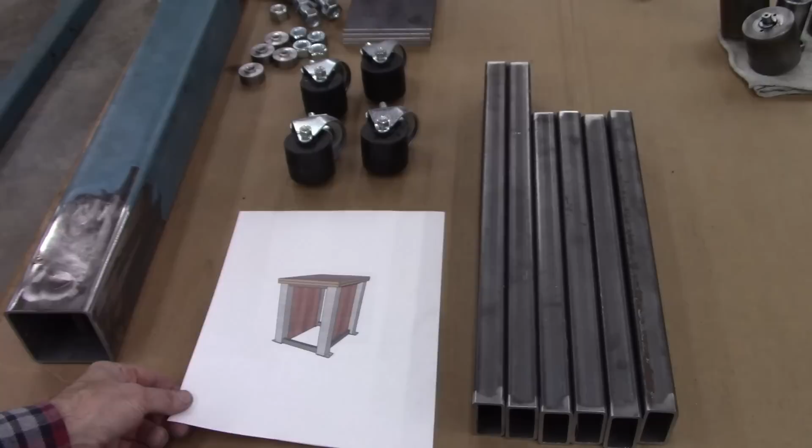Here's the parts for the stand we're going to build. Got some casters. These will have 2 holes drilled in them, and one will be a support bolt, and one will be for the caster. And I'll weld them on the bottom of this tubing I got.

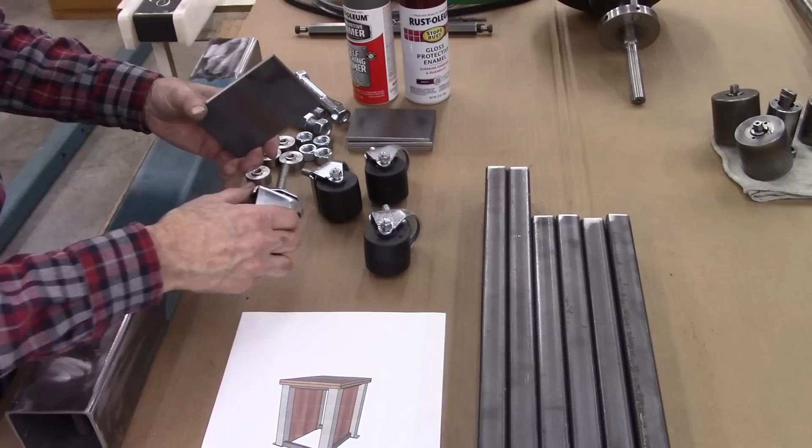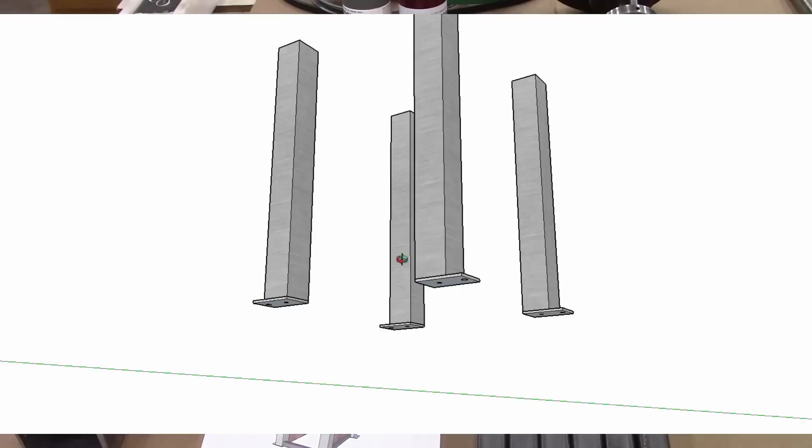Let me show you in CAD what we got. Here's the 4 3x3 legs, and then we're going to weld these plates on the bottom with the 2 holes. One is for a bolt to lift it up off the casters and solidify it, and the other one is for the casters. And then we're putting in the 1x2 tubing between the 4 posts, top and bottom, and then put a top on it.

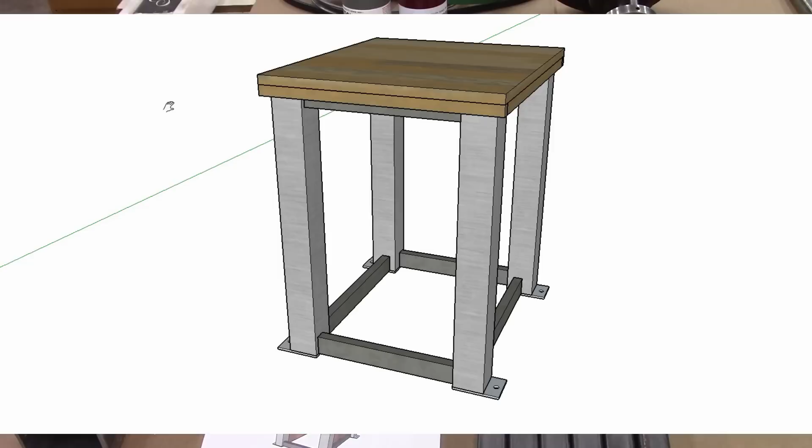And then I'm going to weld those 1x2 tubings on the sides so I can insert a sheet of plywood, and at some future date I will put some drawers in it. I'll make it similar to the cabinet I put under my South Bend. Anyway, let's get started.

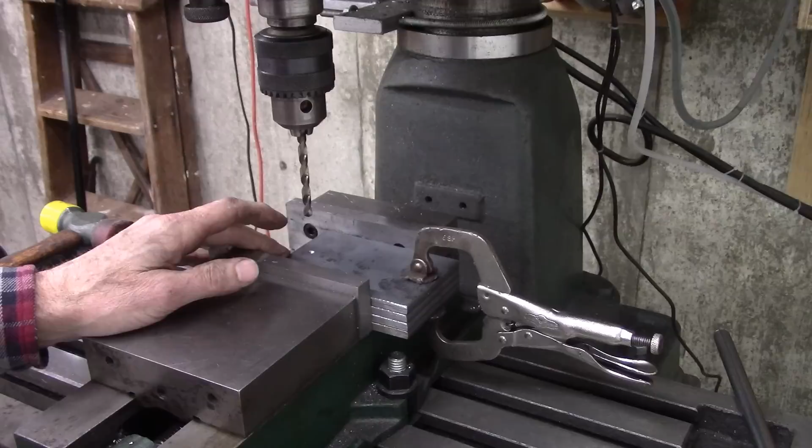Okay, I've got these plates that we're going to weld onto the bottom of our 3x3 tubes set up in my mill. I got this hole positioned here for these, I guess you could call them jack bolts. That's what the stand is going to sit on when it's not sitting on the casters. And it needs to be 5/8 clearance.

And then I'm going to drill another 5/8 clearance right in there. That's what that is right there, and it'll be welded to it. And the casters will screw into that.

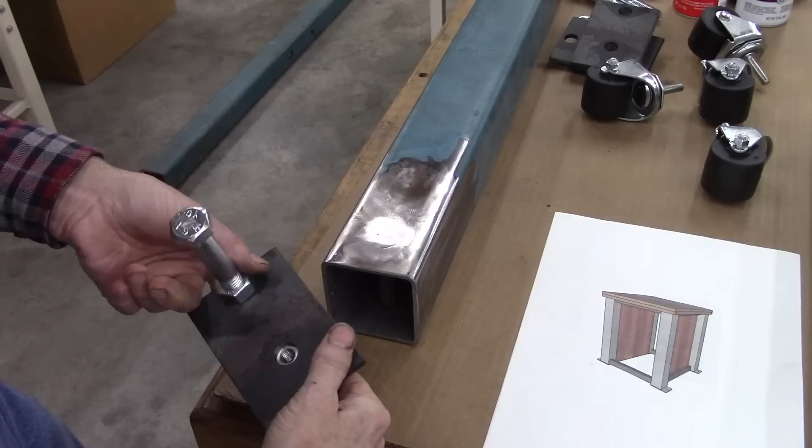Okay, here's how this will be welded. That'll weld on there and be for the caster. And it'll sit right in there like that, welded to the end. That'll be a support so that it's not sitting on the caster all the time.

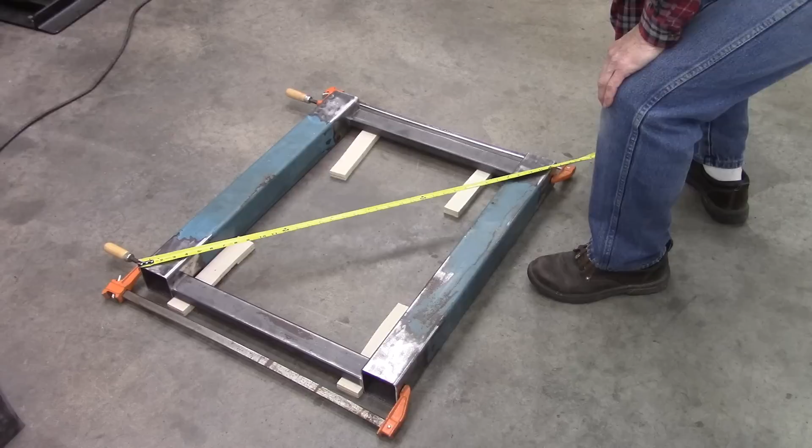Before I put the wheel plates on, I'm going to weld this frame up. I milled the ends of these pieces so that when I clamped it, everything would be square. I measured this way, and that's a good way to check for square. And it's exactly the same, so it's perfectly square. I like it when a plan comes together.

These wood spacers are for the wood to sit on, to leave a space for the wood that I will put in on the inside of the cabinet to mount my drawers to. So I'm going to tack these right here and then turn it over and weld, and hopefully it'll all stay square. I hope my floor is fairly true, because there's no way to really check for a twist.

I guess I could put a straight edge across there and put a level on it, but that would probably be hard to detect any significant twist. I could stick my head down on the floor and eyeball it. But I think my floor is fairly true, so I'm going to go ahead and weld it like that.

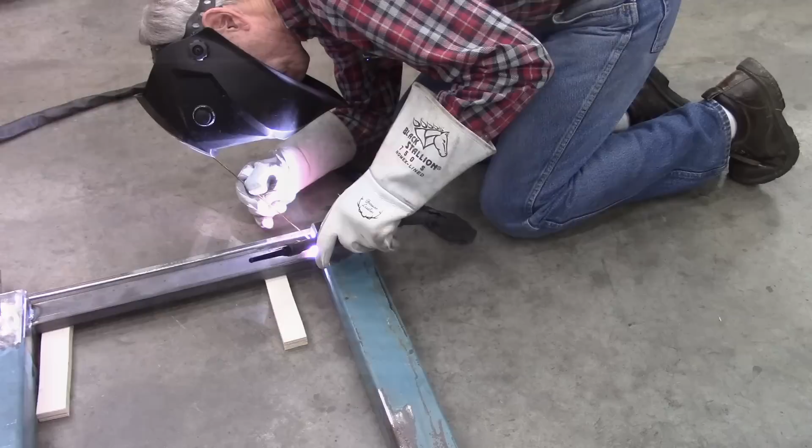Oh, I got to tell you, TIG welding is amazing. Beautiful welds. I think a fillet weld like that is easier because you've got metal to guide the tip with.

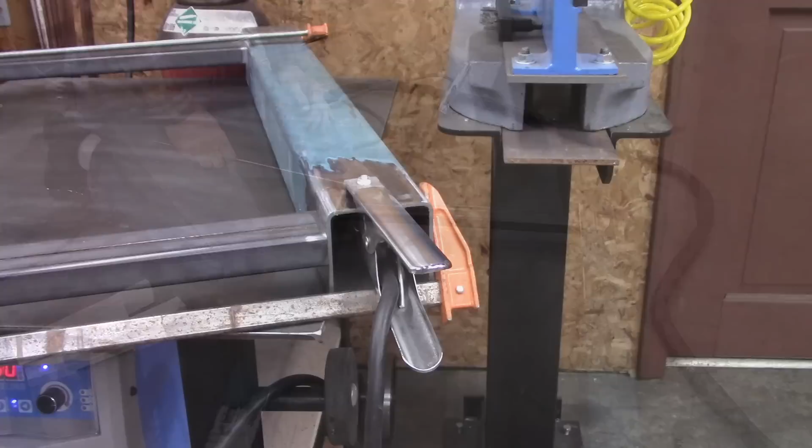I think now I can put that on the welding table. I put the clamps back on it because there was a really slight gap there.

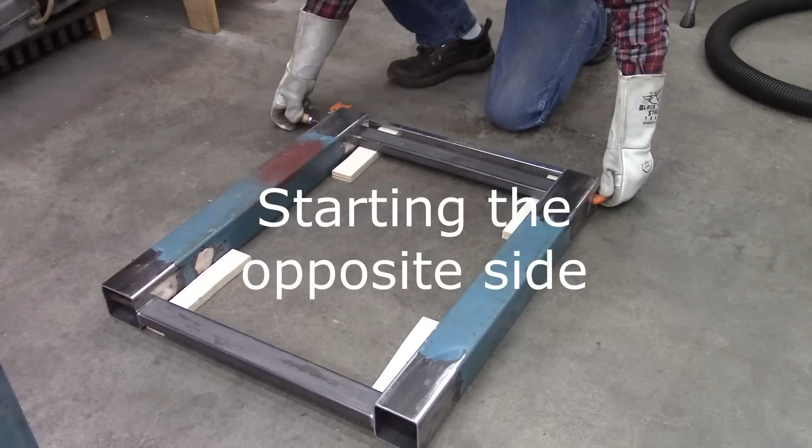Well, I'm loving this Yes welder. I'm fairly new at TIG and I'm having very good success. I don't know, the welds aren't perfect, but considering how long I've been doing it, I think they're excellent.

My biggest problem with welding is being able to see with my bifocals. But I'm doing pretty good. Hopefully my tack welds hold.

Wow, sits level. 1 3/8. Whoa, perfect. Perfectly square. Love it.

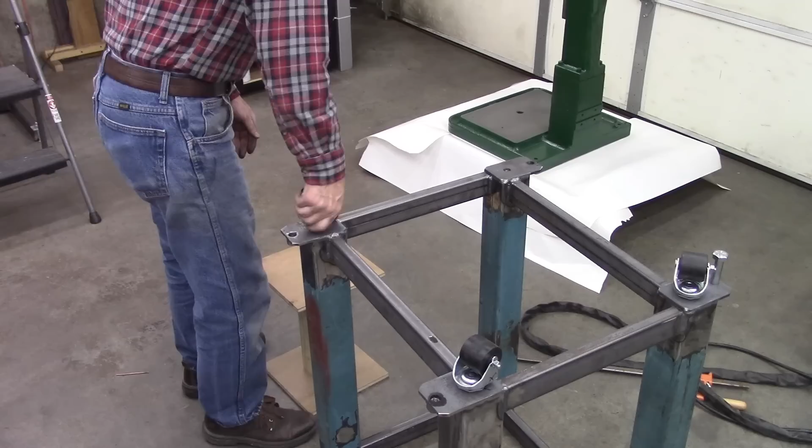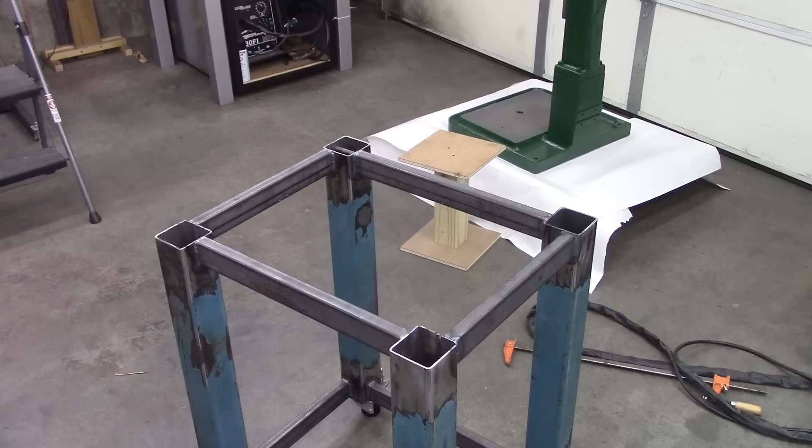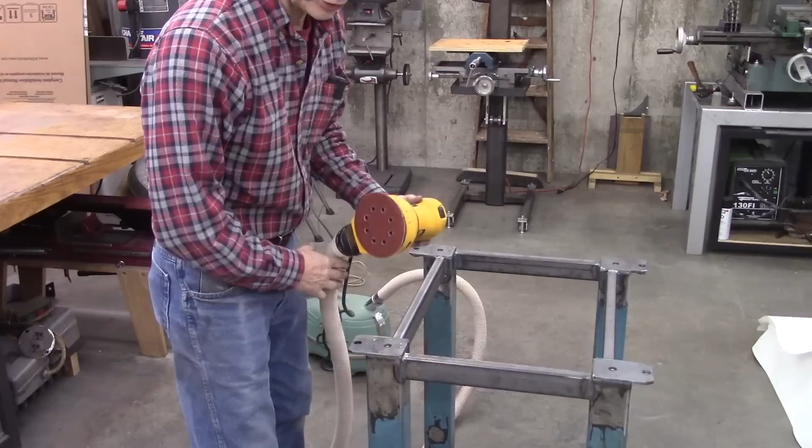Okay, I'm going to clean this up with an orbital sander, and here's a tip for the day. Put a vacuum cleaner on your orbital sander, whether you're doing wood or metal, whatever. It works fantastic because it pulls the dust away from the pad and makes it sand way more aggressively. Keeps your shop clean too.

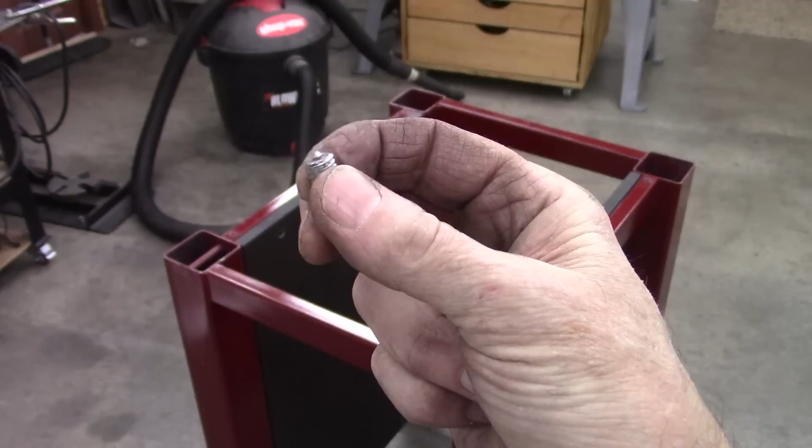Okay, I made these little things. They're just bolts that are cut off, and I ground, or turned, a little tip on them. They do make them commercially. I don't have any. Hopefully these will screw in easy enough where I can get them back out easy.

I'm going to use them to mark the bottom side of the top, so I know where to drill a hole and keep it kind of centered. And I've got some shims made to kind of judge the center.

Okay. Good enough. Now, I hope. Boy, I don't like that. Oh, I see them beautifully. Oh, if you can see that right there on the camera, that's good.

I think they're called T-nuts. That's what I'm going to use on the bottom of this to bolt the drill press to. I'm using a spade bit to slightly recess that. Hope it's big enough. Yep.

A little bit worried about that driving into white oak, but it looks like it's doing okay.

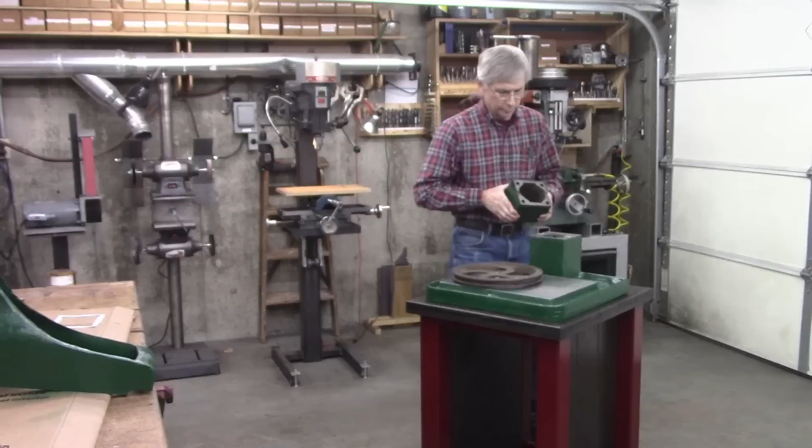Well, that about wraps it up for this episode. I'm really pleased with the way it's coming out. I was a little concerned about the red at first. It's a little in your face, but I think after we get all the parts on it, maybe the drawers, it'll look better. But next episode, guaranteed it'll be under power.

I got a new pulley for it. Looks a little better than that zinc one we had on the 2 episodes ago when I built the drive. It's got a tapered bore in it, so I got to do something about that bore. But we'll put that pulley on the drive system, and might get carried away and put some drawers in it too. But first, we're going to get it under power.